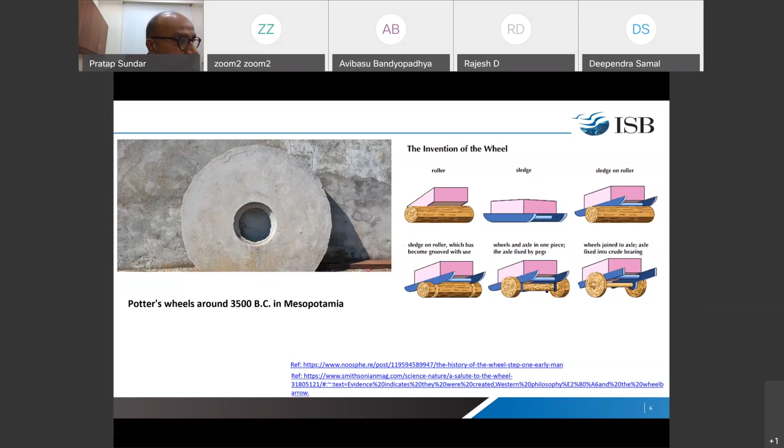So they investigated deeply, and one professor named Howard Berg at Harvard University, a professor of physics and molecular biology, discovered that wheels exist in nature, but at the very micro level. The E. coli bacteria, for example, has a DC motor which can spin at 100,000 RPM to propel itself. This was the greatest discovery. Then they accepted that nature is more intelligent than us in that regard—road infrastructure or transportation infrastructure does not exist in nature on the surface, on a substrate.

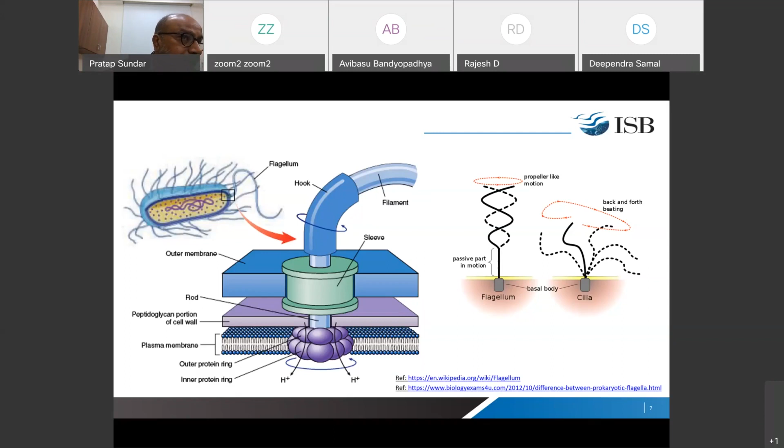So coming to the next examples, when you look at animal architects, some animals don't build a home because their body itself is a home. I will give examples. Then some animals, birds, build elaborate homes to breed, to live there, to protect themselves, and so on. With body as architecture itself, you can see radiolarians in the oceans, mollusca such as snails and conches, and sponges. These are all animals, and their body itself is the home.

Now let me come to the builders. Insects build homes, for example wasps, honeybees, termites. Birds build homes. Reptiles, amphibians, and fishes also build homes—not all fishes, but some fishes build homes. Mammals build elaborate homes. And human beings are very deep into building homes, offices, roads, railways, power grids, and so on.

Animals with no homes generally engage in parasitic activities, like the cuckoo bird—it lays its eggs, and the responsibility of hatching and bringing up that chick falls to the hosts. So such brood parasites exist in nature. Generally, the purpose of infrastructure in nature is to create protected habitats such as homes, to catch prey, for foraging, to communicate between members of the species, for storage, and to create the next generation. These are the general purposes of infrastructure in nature.

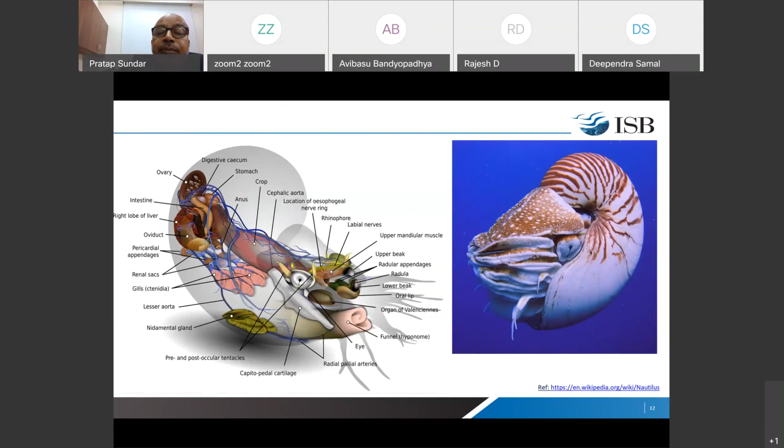When the nautilus is born, there are a few chambers, and as it grows, the shell has to grow. So it moves from one chamber to the next, sealing off the previous chamber with an appropriate mix of air and water, so that the overall buoyancy—density of the animal plus shell—will be approximately equal to the density of seawater, allowing it to spend minimum time swimming from point A to point B.

So that is the energy conservation principle built into the animal's intelligence itself. Nature has not sent the nautilus to school for education, and that kind of thing never happens in nature. But the intelligence is part of the body itself. And as the animal grows, usually growth curves are exponential in nature.

So this is the equation, R is equal to e power a theta. That is the equation that governs the growth of the animal shell. Now, all of you must be knowing about golden ratio, Fibonacci numbers, and so on.

Fibonacci numbers are the basis for many designs in nature. Golden ratio, known as phi, whose value is 1.618, is also extensively found in nature. Golden angle is another very common feature found in nature, whose value is 137.5.

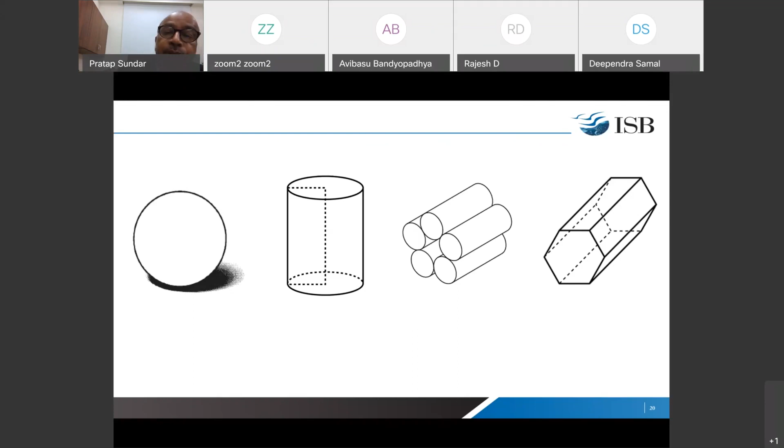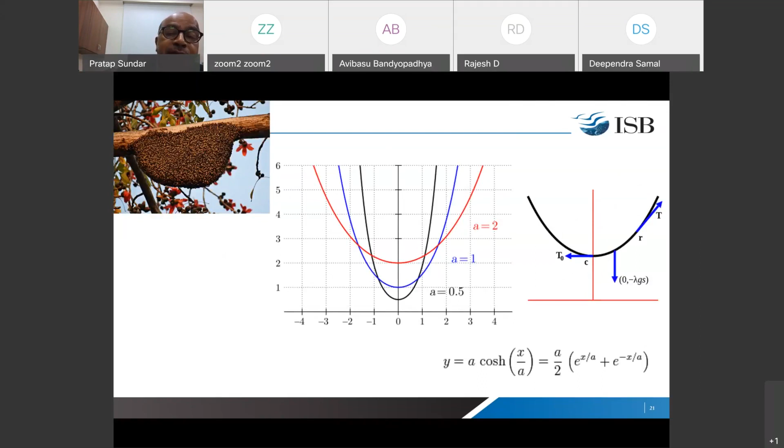Generally, honeybee hives have drones, queens, and workers, and they collect propolis from trees, pollen for protein, and nectar for sugars. These are the three things bees gather. Propolis is used for sanitation and smoothing, protein pollen is used to create protein, fat, vitamins, minerals, bee bread, and so on. Nectar is the pure carbohydrate from which honey is made, and from all these things, the bees create royal jelly, wax, chemicals, and even venom to sting attackers.

So a few points about honeybees: they are pure vegetarians, and bees are absolutely clean. They don't need Swachh Bharat programs for millions of years. They have been clean always.

They have 12-hour work days, and they get up at sunrise. They stop working at sunset, because all their navigation is aided by the sun. In the absence of sun, they cannot navigate.

They do not defecate inside the house. When they die, they go outside and die, and they always share food. They adjust the population of the hive according to economic conditions.

They defend their queen at any cost. But if the queen is impaired or physically handicapped, then they kill the queen. They don't tolerate a handicapped queen.

They are master architects, engineers, chemists, and navigators. When they select a site, for example, I visited and spent three days studying honeybees in a field with an entrepreneur near Vijayawada in Andhra Pradesh. This is a photograph I had taken.

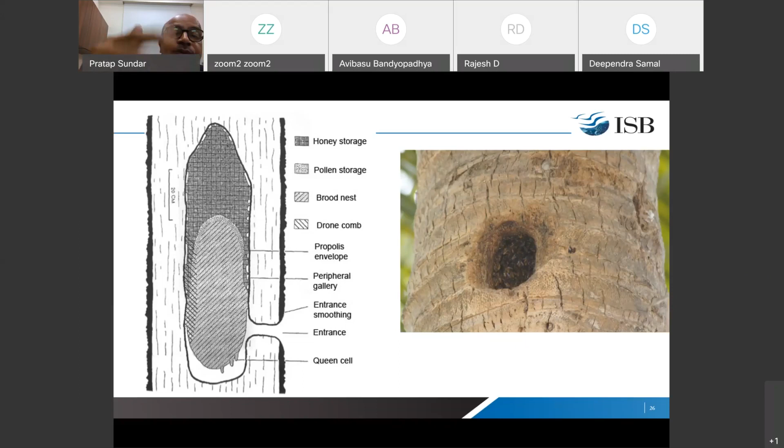The criteria when they select homes, they look at these factors: size of the entrance, direction of the entrance, height of the entrance, position of the entrance, shape of the entrance, and so on. This study was done at Cornell, and they select the site based on democratic principles.

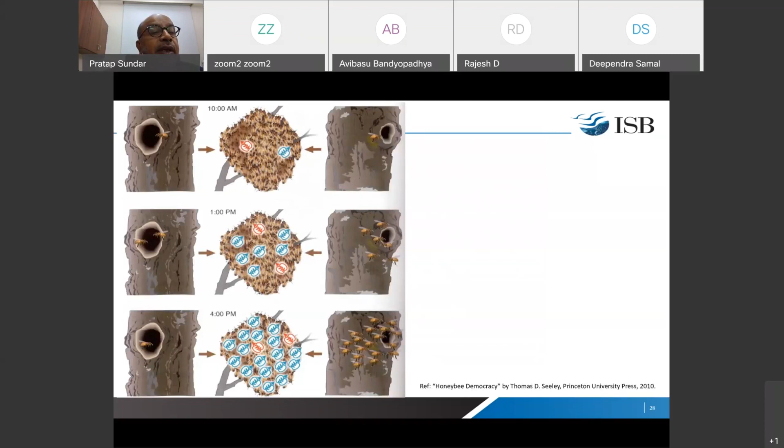If they find two potential sites, the scouts first go and inspect the sites and come back and communicate their preferences. Then the neutral bees fly and join either the group that favors site A or the group that favors site B, and the whole thing goes on for 8 hours or so.

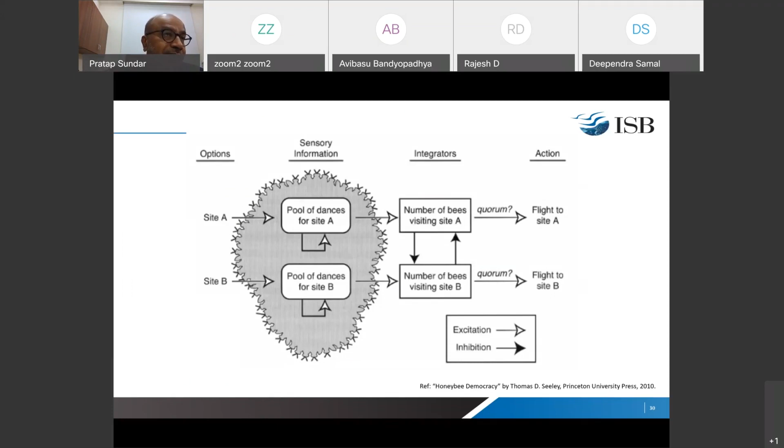Then the majority of the bees will accept a suitable site, and the remaining bees will join without further questioning. This is called honeybee democracy. Seeley has done extensive research on this.

They have designed different types of boxes with different types of holes, sizes, entrance sizes, and kept them at different heights. They have done all these studies and published a monograph called Honeybee Democracy, which I read long back. If you are interested, you can read this. It was published by Princeton University.

The purpose of the dance is to communicate the richness of the food source, which source is rich in terms of nectar, the direction in which that source exists, and the distance to that source. These are all the factors conveyed in the dance.

This is the honeybee dance. It is of two types. This is how they communicate, by dance language. One is the round dance, another is the waggle dance.

Karl von Frisch spent his entire lifetime studying honeybees and how they communicate, because in organizations, communication is very important, as we all know. In colonies of 30,000 bees or a lakh bees, how they communicate with each other and how they make decisions are all intriguing questions.

He won the Nobel Prize for his work on honeybee dance language, in 1973. You can read his Nobel Prize presentation, the Nobel lecture, on Nobel.org. Please read it, you will enjoy it much.

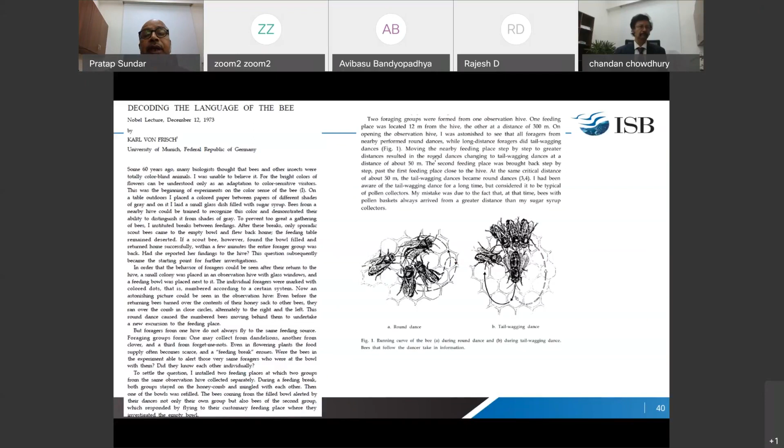Next example, fortress builders. I want to touch upon termites, which is again a very fascinating subject.

These termite colonies consist of maybe several thousand to sometimes up to 1 million, even 2 million termites living together. There are male reproductives, reproductive females, soldiers, workers, and winged reproductives.

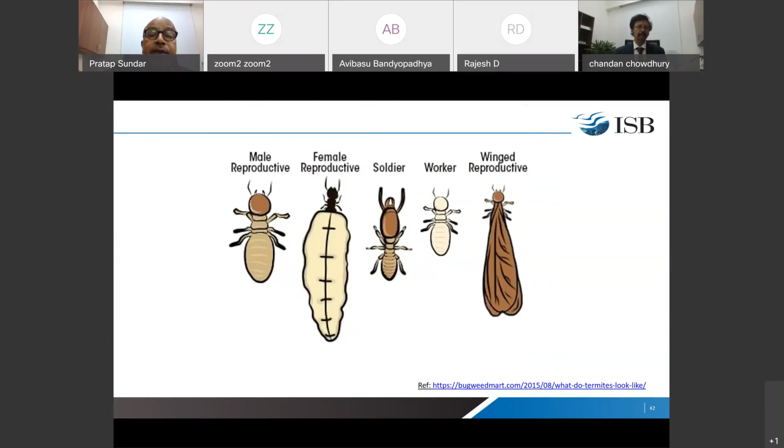The Nobel laureate Karl von Frisch has commented on how 1 million workers who are completely—one more thing I forgot to tell you, all termites are blind. They cannot see. But they coordinate completely and work together to accomplish great projects.

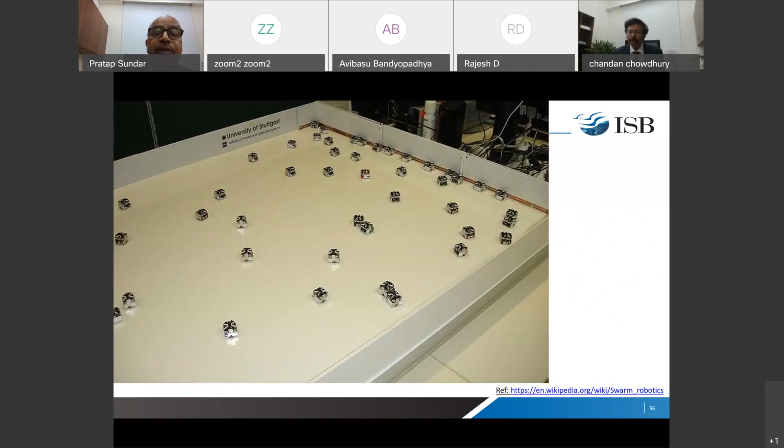Algorithms based on swarm intelligence are put into practice, and you can read this online—if you search swarm intelligence, you will find it. Or if you visit a biomimicry website, there are a lot of examples of how swarm intelligence can be used for infrastructure management, even for swarm robots—what algorithm should govern hundreds or thousands of robots. Swarming ants, honeybees, and termites have given a lot of clues for building and writing programs for these kinds of robots.

Last example, in one minute, before I hand over to Professor Chandan Chowdhury. I don't know how many of you have read this book—I read it many times, and it has opened my eyes. This book is written by William McDonough and another author. William McDonough actually has an architecture company, and he designed the Hero MotoCorp garden factory at Neemrana, India.

The vegetation surrounds the workplace. It penetrates inside the assembly line also, makes its way into the roof, and at every scale enhances the ambient temperatures, air quality, and the visual environment. This factory generates electricity from solar energy, generates oxygen, and harvests irrigation and other things.

Carbon dioxide feeds the vegetation, generating food—this factory. Please visit the Neemrana plant when you get a chance. It's a world-class plant, and we are proud to be associated with it at Munjal Institute for Global Manufacturing. We are very happy that Hero Corp has done remarkable work at the Neemrana plant.

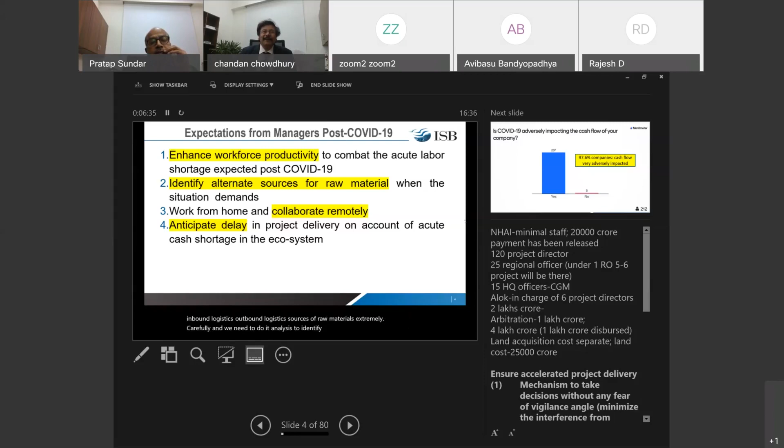Friends, one of the recent studies we have done made an attempt to understand the impact of COVID-19 on cash flow of organizations. 97.6% of the companies say their cash flow has been very adversely impacted.

When it comes to productivity, because of the pandemic, lockdown, various restrictions, social distancing, and lack of adequate digital collaboration platforms, 92.2% of the companies we studied say their productivity has decreased.

When it comes to raw material procurement, 41.7% of the companies say that their raw material procurement process is very adversely impacted.

Now, when you look at work from home, many organizations with very short notice asked their employees to work from home. When it comes to real infrastructure, 54.2% of our respondents said in our study that they do not have work from home infrastructure.

When it comes to digital innovation infrastructure, which is more important than just work from home infrastructure, only 8.7% of the companies say that they have got digital innovation infrastructure.

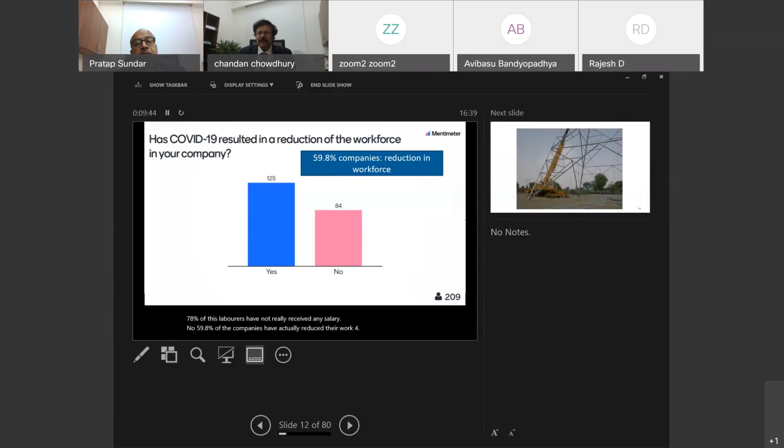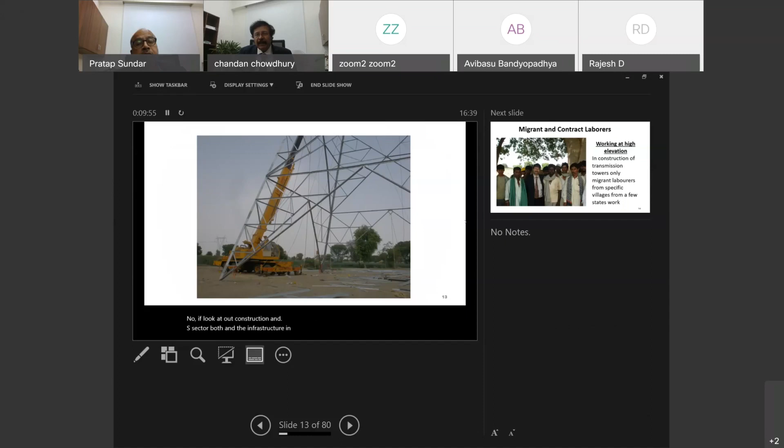Now, if you look at our construction sector, both infrastructure and real estate, you would find that laborers, the migrants, dominate. I had visited several construction sites, and if you, for instance, go to transmission tower construction sites where migrant laborers work at very elevated levels, you would find that many of these laborers actually come from Orissa, West Bengal, Bihar, and Jharkhand, and they have specialized in the art of working at high altitude.

And even if you give money, some of your local people may not be able to do the work. So when actual construction work starts, you would find that because of reverse migration, we have a problem.

Now look at the example of Punjab. Punjab is slightly different than many other states. The people of Punjab, the government of Punjab, actually ensured that food is available for migrant laborers. You have around 12 lakh migrant laborers. They serve 2.52 lakh industrial units. And in Punjab, in the agriculture sector, you nearly have 12 lakh migrant laborers.

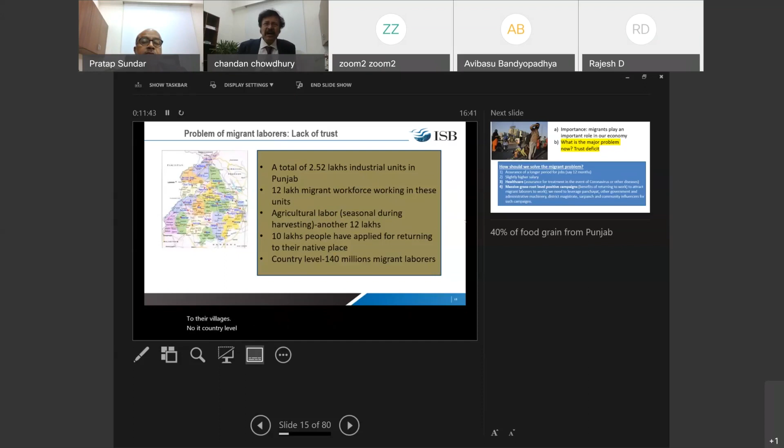Some of them are common. So when these migrant laborers were actually asked whether they want to go back to their native place, 10 lakh said that they want to go back to their villages. Now, at a country level, probably we have more than 140 million migrant laborers.

So when the story of COVID-19 will be written about India, one of the areas that we will feel ashamed to read is the way we have handled the problem of migrant laborers. Those of us who live in society, those who rule the government in the state and center, I think there are several things which could have been done much better than the way we have handled it.

So migrants play an important role in our economy, right? There are many people who say that our economy runs by migrant laborers. At the minimum, we must say that migrant laborers play a very, very important role in the economic growth of our country. Now, what's the problem today?

Why in states like Punjab, where the government is ready to give food and shelter, you find that laborers want to return? So when we interact with migrant laborers and people who have been interacting with them, we understand that one of the biggest problems is actually trust deficit.

It will be extremely important that government, both at the center and state, and the NGOs and professional bodies, start doing positive campaigns about the need for migrant laborers. Because of trust deficit, migrant laborers feel that if they fall ill, they will not receive the kind of healthcare that they need, and therefore they prefer to go back to their native places. Even if they have to die, they prefer to die in the presence of their family members.

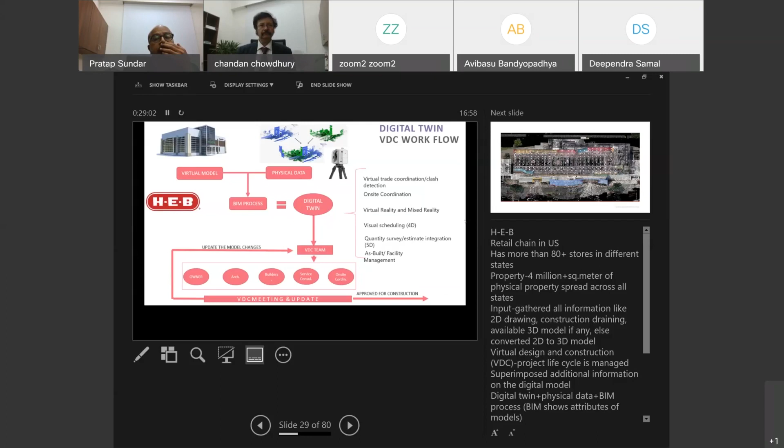Overall, the benefit they got is that with a digital twin, you don't just take decisions based on virtual data, but combined with physical data and a BIM process, it gives you a clear perspective of where you are heading. And it combines all of the stakeholders together. It was a very successful project for HEB.

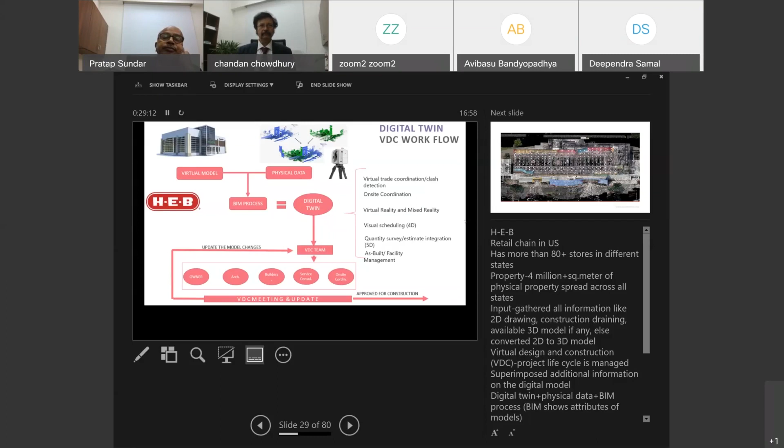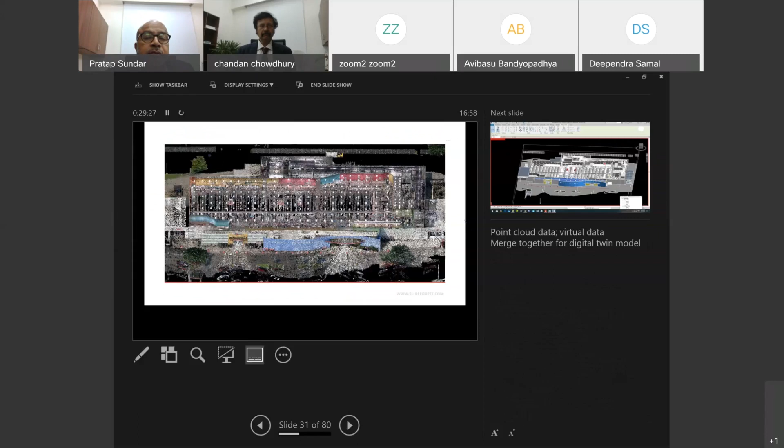If you have the next slide, I'd like to show some of the physical data we captured for them. This is a replication of the physical data in 3 dimensions from laser scanning, with an accuracy of plus or minus 6mm of the physical data. And the next slide, this is the virtual model we created for HEB.

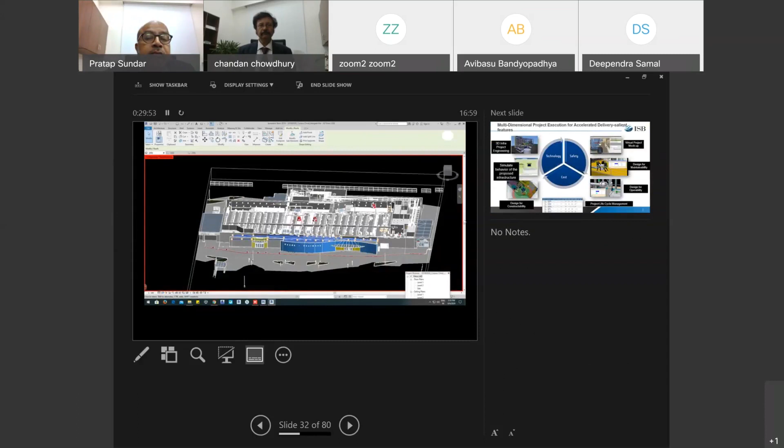My observation is that we are getting more and more inquiries on this now, because with the COVID situation where there's less human interaction, this digital twin enables every stakeholder to be in sync with project management, be it contracts, delivery schedules, standards, or saving time and cost. It's definitely going to be a key tool for all construction projects going forward.

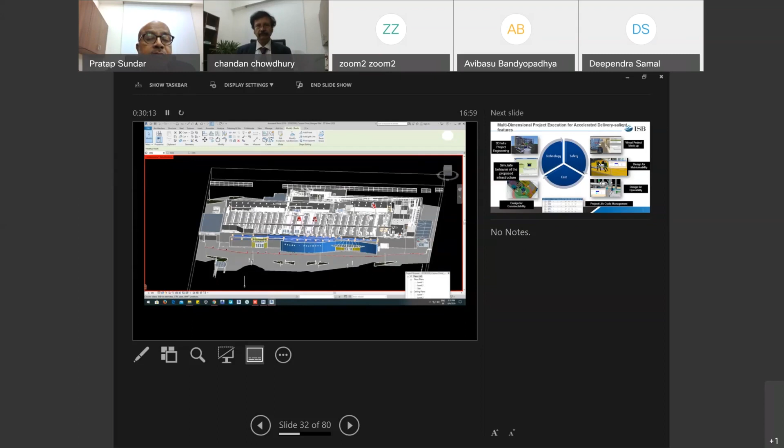So, any questions you can ask. Thank you so much, Professor Chowdhury. Over to you now.

So friends, let's try to imagine you've got a big project, a massive project. First, with the kind of technologies available today, you can do what is known as 3D infra project engineering. So first you engineer the project in 3D. Now these 3D platforms today are very, very sophisticated, with a lot of inbuilt science and inbuilt technologies.

Once you have engineered the project, you can simulate the behavior of the infrastructure project. You can check for constructability. You can do a complete virtual mock-up of the project. You can look at design for maintainability, whether you'll be able to maintain the project. You can look at operability and servicing of the project. You can do what is known as complete project lifecycle management. So when you build a physical infrastructure, you not only build the physical infrastructure, you first create the digital twin.

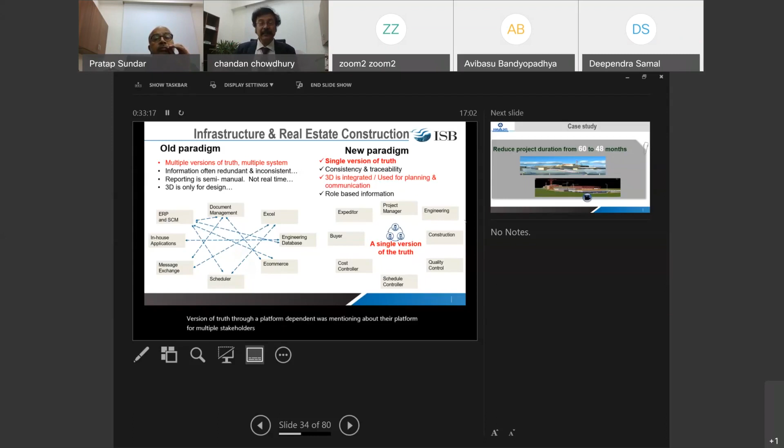I want to share with you quickly one example. This was a very interesting project that I had visited in Russia, an organization called NIAEP. When I went there and interacted with them, I learned that in this massive project, they used to do engineering and installation of nuclear power stations, and they reduced the project duration from 60 months to 48 months.

And how did they do it? They engineered and virtually constructed the project first. And when they do the virtual construction, they look at how long does it take. Suppose it takes 4 years, they will see how can I reduce it to 3.5 years. So through simulation and iterations, they mastered the art of reducing the duration of the project.

They delivered a project that traditionally would take 60 months, in 48 months. And each of those projects is approximately $5 billion. Then they went around the world just to say, hey guys, I can deliver your project in 48 months as against 60 months. And they booked some 20 odd orders, I was told, which is an order booking of $100 billion. Actually, when I went and visited this site, I could see the complete project.

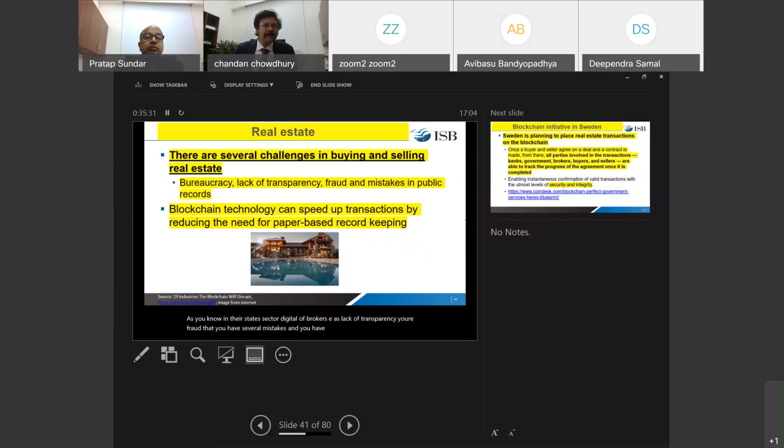Now friends, I wanted to share with you a few examples from real estate as far as the use of intelligent technologies is concerned. In the real estate sector, there is a lot of bureaucracy, there's lack of transparency, you have fraud, you have several mistakes, you have a lot of public records, so there are a lot of confusions.

For example, you can use blockchain. If you look at Sweden, Sweden decided to use blockchain for their project. So what they have decided is that when a buyer and seller do an agreement and a deal and they have a contract, all parties involved in these transactions, the banks, the governments, the brokers, the buyers, the sellers, are all able to track the progress of the agreement, and they have a single version of truth. There is security, there is integrity, and you cannot actually fiddle with the records.

Now one very interesting example I would like to give: if you look at India, you have the brokers, you call them in US as realtors. Now if you look at realtors, they deal with a lot of legal documents, a lot of documents. They do a deal, and sometimes keeping track of it is very difficult, and over a period of years, they have voluminous documents.

In fact, machine learning is extremely useful. Machine learning can be used for data-driven decision making. For example, if you are into sales, you can figure out by leveraging machine learning whether your prospect is going to buy, what is the buying pattern of the prospect, what are the conditions you need to follow, what are the do's such that you strike the deal, what are the don'ts that can lead to a risk and you may lose the deal.

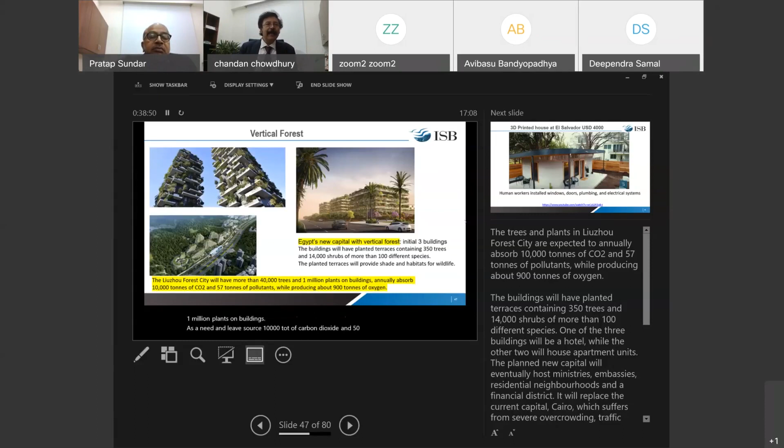In fact, this whole concept of vertical forest is also becoming very, very popular. You have Egypt with vertical forest. In South China, you have this Liuzhou forest city, where you have 40,000 trees, 1 million plants on buildings, and it annually absorbs 10,000 tons of carbon dioxide and 57 tons of pollutants, and produces 900 tons of oxygen.

3D printing is becoming very, very popular. In fact, we are talking about affordable housing program in India. I think 3D printing can be very, very useful. In El Salvador, they have been able to print a house in $4,000. So you print a house, then human workers come, install the windows, the doors, the plumbing, and do the electrical systems work, and they have been able to bring down the cost of 3D printed houses.

We had a team at ISB. These were engineering students doing our technology entrepreneurship program, and I had the privilege to look at their project. One of these students actually started her own company, incubated at IIIT Hyderabad, which is in 3D printing of construction sites. I think as far as managers in real estate are concerned, leaders in real estate, leaders in infrastructure sector, they got to learn infrastructure financing.

If we want to work and be a leader in the infrastructure segment, we need to understand infrastructure economics. We need to understand infrastructure regulations. Regulations are going through a lot of change, so we've got to understand them. Many of our projects get delayed because of environmental issues, so social and environmental issues in infrastructure are very, very important.